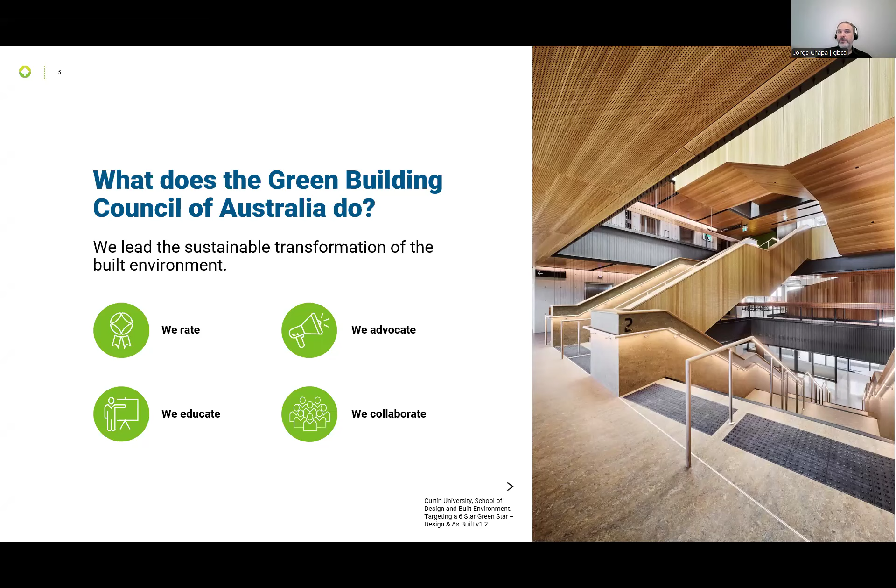We have 4 key areas of activity. We advocate to local, state, and federal government. We do a lot of courses, training, seminars like this. We do a lot of collaboration. Everyone that is presenting today, we collaborate strongly to make sure that we're all aligned, we're all working together towards the same goal. And we're very well known for our rating system, Green Star, which I'll talk about in a second.

And realistically speaking, we also haven't focused on embodied carbon because it hasn't been seen as a big source of emissions for a long time. It was a significant source of emissions, but compared to the other challenges that we had, it wasn't where we were placing our efforts. That's changed, and that's changed a lot in the past few years.

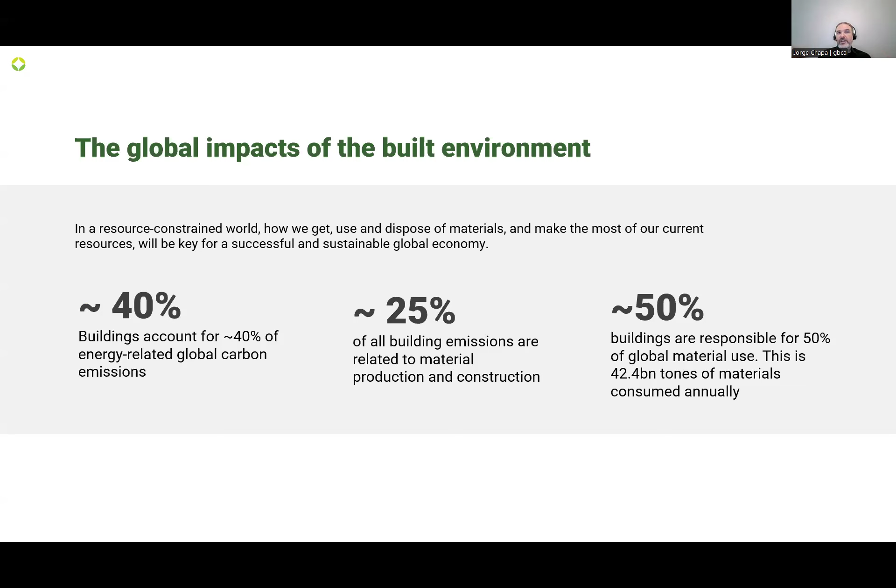So we did a bit of work. We did this report with ThinkStep, the Green Building Council of Australia, around embodied carbon and embodied energy in Australia's buildings. And so we did a bit of forecasting. And we said, if we look at all of Australia's emissions, how much of the emissions are operating emissions? And the answer was 84%. And right now it's probably about as much. Only 16% is embodied carbon. But if you throw your mind forward, if you do a bit of future casting, you find that 85% becomes embodied carbon. Now, what's changed?

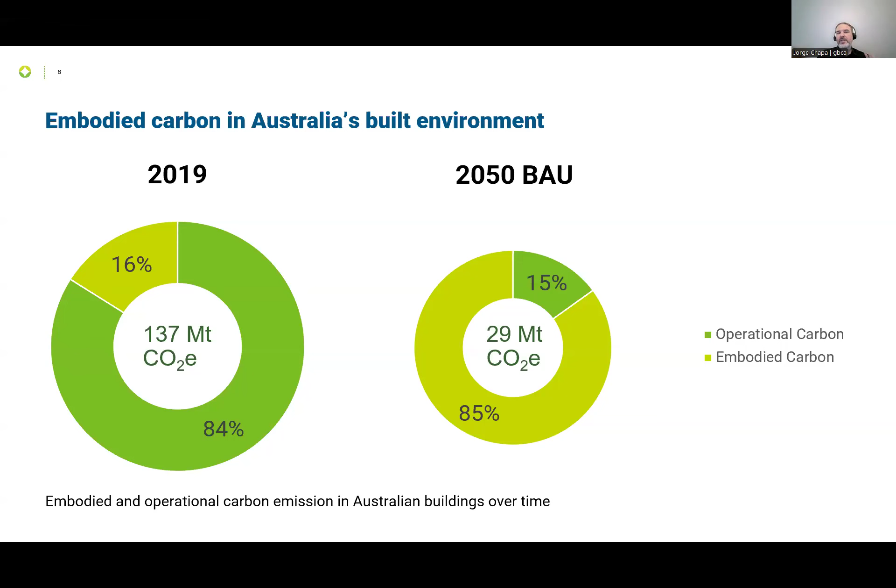And the best way that I can represent this is through a bit of calculations when you think about it in just a building. So we did a bit of work in GBCA, again, a few years back, where we looked at a bunch of sources and said, look, best as we can gather, this is what a typical building looks like in 2020. It's a tenanted building, it's in Sydney, and we're making a lot of assumptions, but it kind of holds.

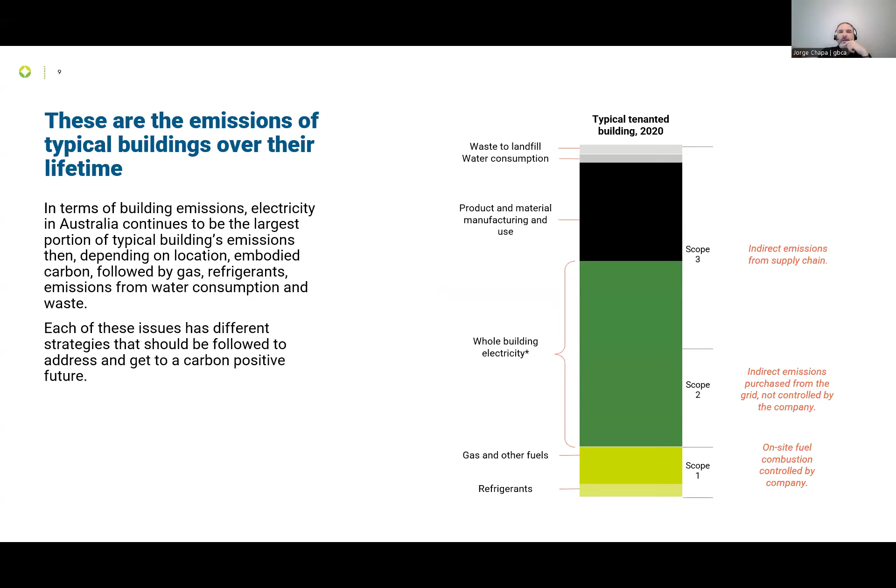Most of the emissions are electricity and other fuels, a little bit of refrigerants, a little bit of waste to landfill, and about 20% of that is product material manufacturing and use. And that actually seems to have been consistent in 2020. And you'll see that there's scope 2 and 3 and so on, but just ignore that for a second. But is that always the case, right?

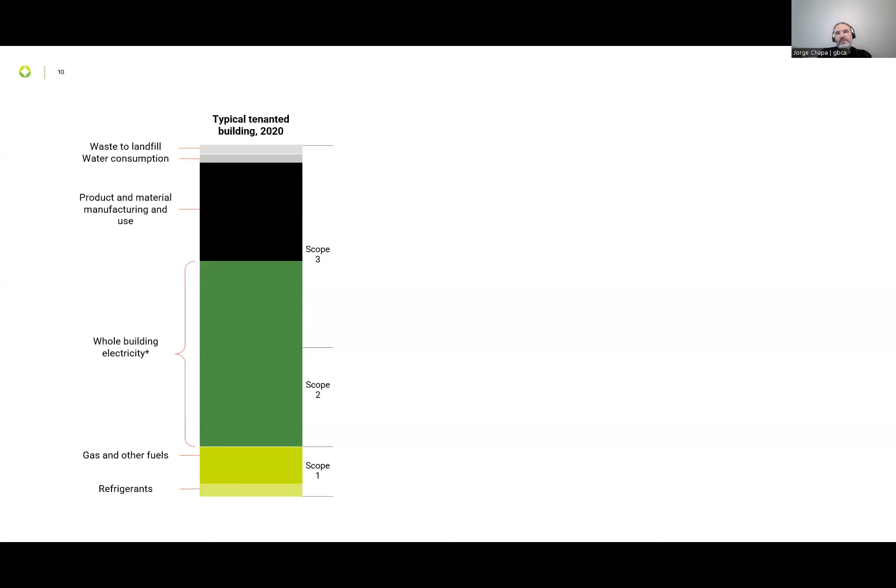Here's the thing. A year later, we had the step change scenario from AEMO, and that showed a much more drastic reduction in the emissions profile of the grid. So we take that building, we apply revised factors, exact same building, but the emissions profile is different. And that continues to tell you that changing embodied carbon or the upfront carbon is really important, but we shouldn't be trading off operating emissions for embodied emissions. We have to start treating them separately. We have to start taking them into account by themselves, because we only get one shot at doing this.

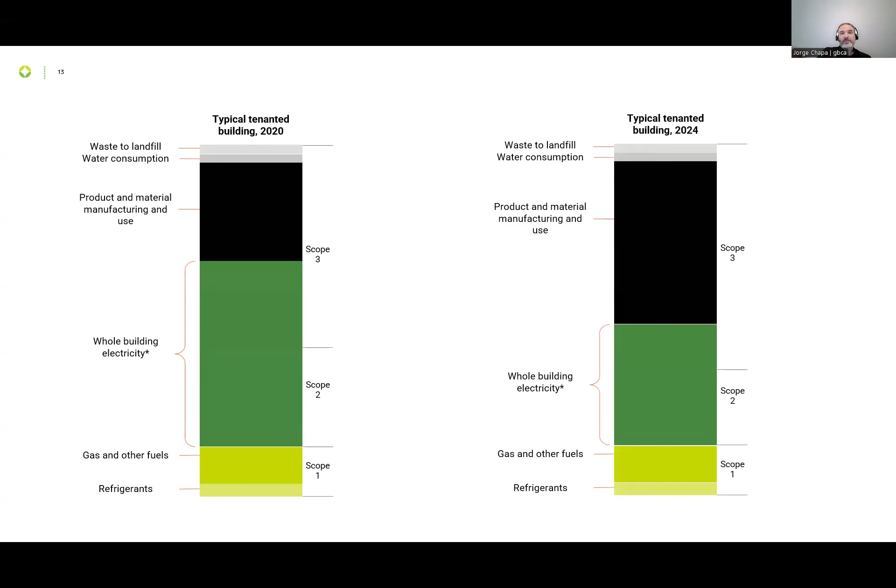And when you look at where the upfront carbon is, you start really realizing why this is the case. Most of the embodied carbon in a building is in the superstructure and the substructure. More than 50% of it is in those elements. You add the envelope and facade and you get to 65, 70%. But we don't change a building structure over the lifetime of the building. We build it once.

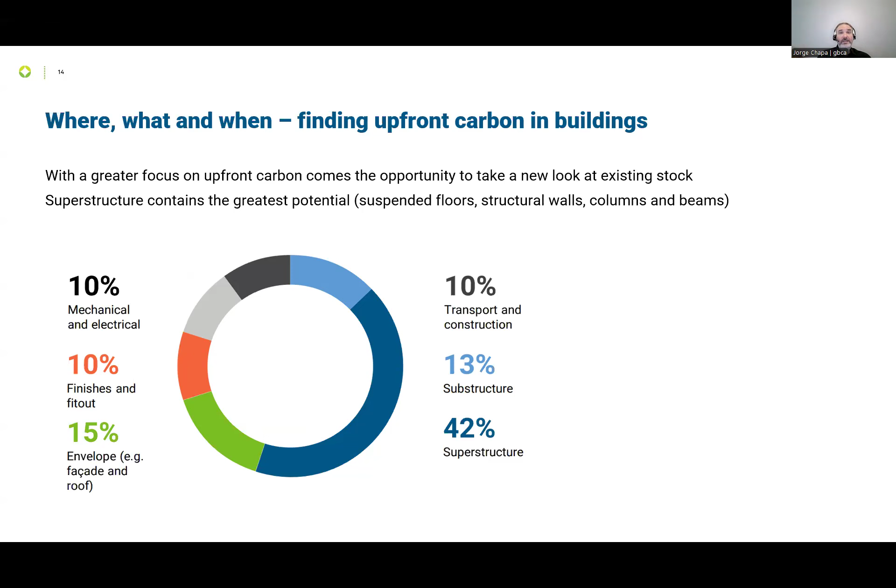We started looking at this problem as well a few years back. We've done a revision to Green Star recently. It's in Green Star Buildings. So in 2020, we launched a change to Green Star Buildings on the basis that we needed to tackle the upfront carbon problem. On the same logic, right?

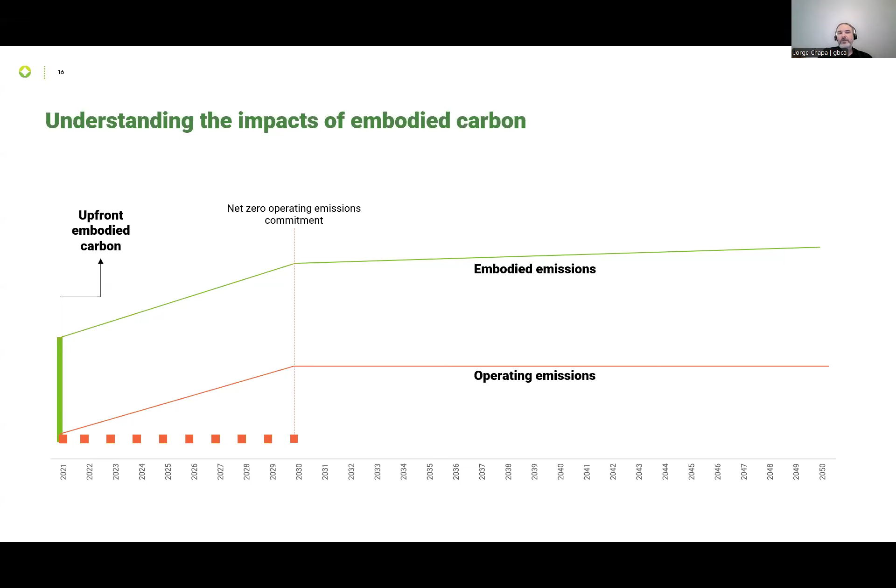We can bend operating emissions at any point in time in the building's lifetime, or mostly we can. We get a few shots at doing that. We can change the emissions profile of the grid, we can electrify the building, we can improve the mechanical systems every 10, 15 years. We might be able to improve the facade every 30 years or so. So there's options to change it, but we can't change the upfront carbon. That's it. We can't do anything about that.

We introduced a credit and a requirement in Green Star called upfront carbon emissions. There's a requirement that you have to do 10% reduced emissions over a typical reference building. And we ended up with a bit of a hiccup, essentially, which is how do we define a reference building? So we have a methodology, we work through it, but then we approached NABERS, and James will talk a lot more about that, which is how do we solve the problem? Because it's not good enough that we have a reference building. You can do a lot of things to that reference building to make it look like it has more upfront carbon and not really change your process.

So we're very excited about the work that NABERS is doing, that we're integrating into Green Star to have ideally a fixed benchmark for the building. We've done that across the buildings range too, but the embodied carbon question also shows up in communities and fit outs. We also have credits that specifically ask for environmental product declarations in buildings, because we're trying to encourage the manufacturers to provide that information to the building sector.

Now here's the kicker. You might say, so what? What you have on your screen are all of the frameworks that currently are driving action on upfront carbon today. So if you're an investor, and you're securing sustainable finance, and your investors are from overseas, the European taxonomy requires you to care. Or in the next year, the Australian one will care. Science-based targets requires you to look at your embodied carbon emissions. GRESB, which is a reporting framework for the built environment, is going to ask for disclosures around embodied carbon.

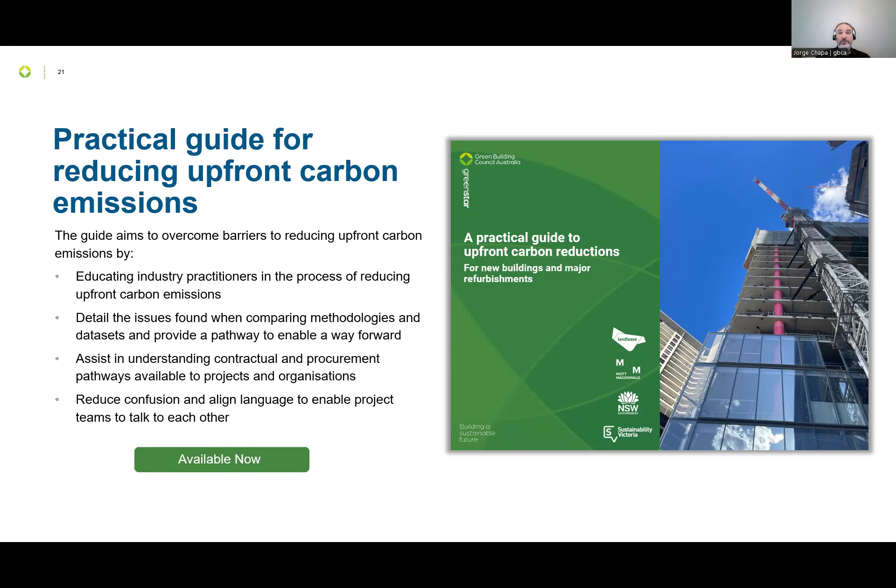If you're interested in learning more about upfront carbon, I hope you don't mind me plugging this, Jeremy, but there's a great guide that ourselves, NABERS, and several other entities worked together on to talk about how to reduce upfront carbon emissions. It is a very practical guide. It gives you a lot of very useful information, and it's available on our website if you want to take a look at it. That's it for me.

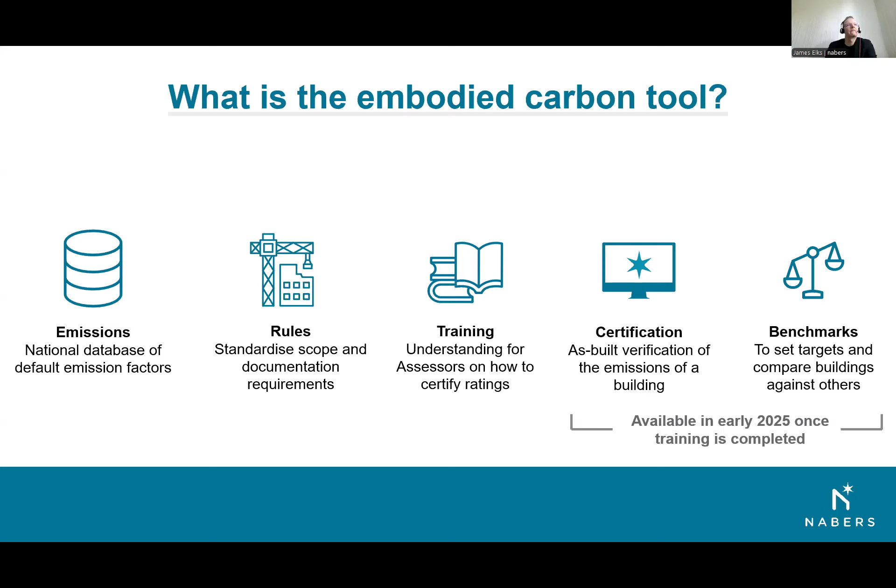So the life cycle of the rating, because we get lots of questions about that, because the rating actually happens at the end. So we'll start at the bottom. You get an embodied carbon rating once your building is built. And you're basically looking back in time, looking at all the stuff that went into the building and saying, we're pretty confident that the amount of carbon that came out of the construction of this building was X.

But before that, we really want people thinking that through, right? We want people to change their behavior as they're both designing and constructing buildings. So we have two things that people can do. They can sign up to a commitment agreement for embodied carbon, same as a commitment agreement for energy, if you're familiar with that. It says, we will reach 5 stars or 6 stars or whatever number of stars you would like. It's 1 to 6 stars for NABERS. We will reach that number of stars when this building's constructed. Then you do the as-built, happy.

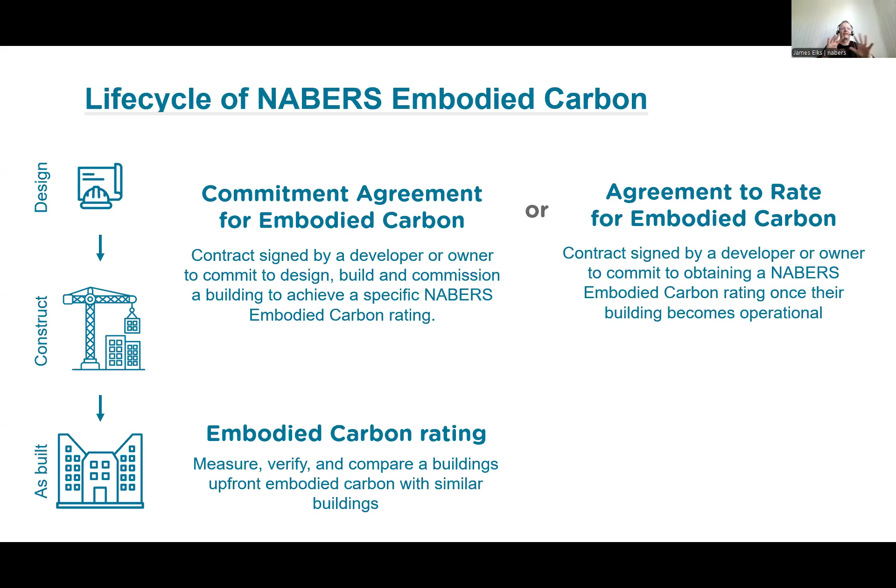The other product we have, which is typically more used in a policy sense, is agreement to rate. And that just says, we will get a rating. We're not sure what it's going to be, but we're definitely going to get one. So essentially, design and construction, those two products, and then embodied carbon. The costs for these, commitment agreements and agreements to rate, are the price that they were previously. Commitment agreements, relatively pricey, $8,375, because it is a big product that does a lot. Happy to talk about that another time. And then agreement to rate, $1,950.

The actual rating itself, we've split into smaller buildings and larger buildings. Obviously, well, is it obvious? Lots of buildings that are doing a lot of work with embodied carbon are larger at the moment. And so the price for smaller buildings under 2,000 square meters is, oh, these prices are wrong. $3,790, and more than 2,000 square meters is $4,790, and that's the certification fee.

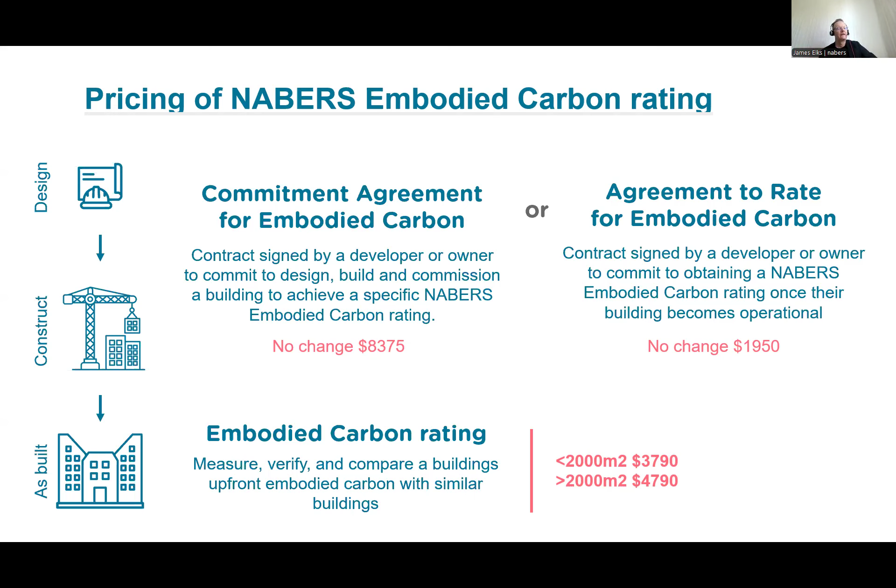So on to training. So we want people to be assessors. Being an assessor is tough, and it's really suitable for quantity surveyors, construction professionals, sustainability professionals, but with a background in things like LCA.

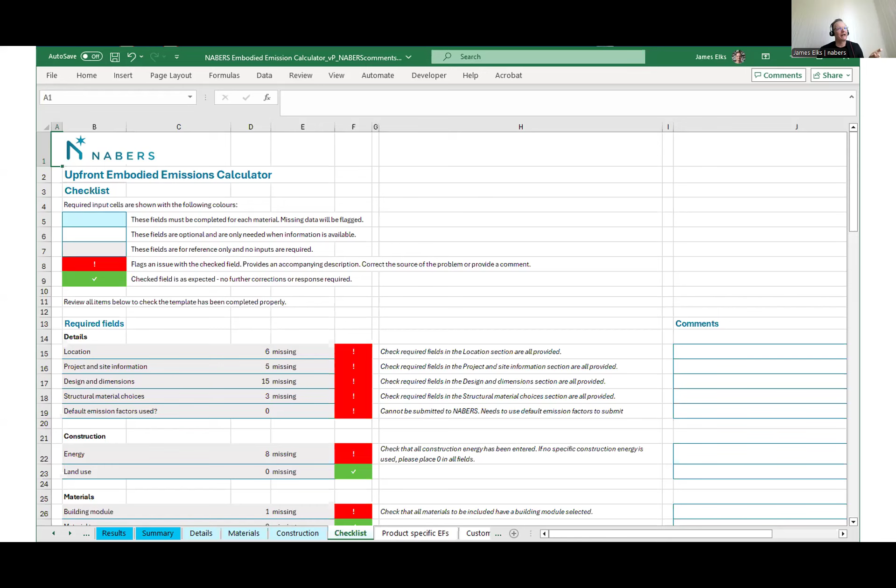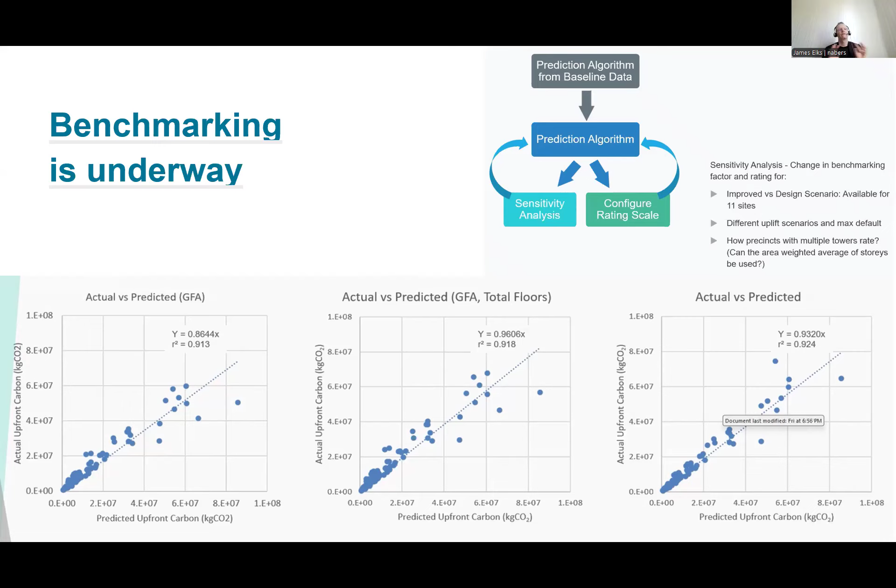which is kind of obvious, but does not necessarily hold true for things like energy. When we're looking at energy or water, the size of the building can be quite disconnected from how much air conditioning it uses. Embodied carbon, pretty good relationship. So we've got that, and now we're starting to look at secondary correction. We're looking at how high it is, is a car park stacker something that's important, really going into quite a bit of detail. Does the type of soil that it's built on have an impact on how much carbon's in it? That's where we're at at the moment. We do a bunch of sensitivity testing on that too as we go. And again, that will be available in the new year.

That's it from me. At this point, it's a handover. We've got the tool, it's launched, people are going to start certifying from early next year, which is very exciting after working on it for 3 years. But what we really need now is some policy stuff. So I believe our next presenter is going to talk on that very topic.

Thanks, Jeremy. What a beautiful segue, James. Thank you for your presentation on the tool, and we'll come back to questions on the tool at the end of Alison's presentation. But as you said, what we really need now is some policy. And thankfully, ASBEC, the Australian Sustainable Built Environment Council, has been busy at work thinking about this exact issue, what a policy framework looks like for embodied carbon in Australia.

So I'd like to introduce Alison Scotland, who is the CEO of ASBEC. ASBEC is a body of peak organisations committed to a vision of more sustainable, productive and resilient buildings, communities and cities. Alison has a passion for collaborating across industry, government and not-for-profits. Prior to ASBEC, she was director at Partner Housing Australasia, a not-for-profit providing resilient housing across the Asia-Pacific region. So, Alison, I'd like to hand the microphone to you now to tell us a little bit about the policy roadmap that you've been developing.

Thank you, Jeremy. And can you see my screen okay? All good. All good, fabulous. So fabulous segue. Thank you, James. I love it. It's like we discussed this order, but that's the whole thing.

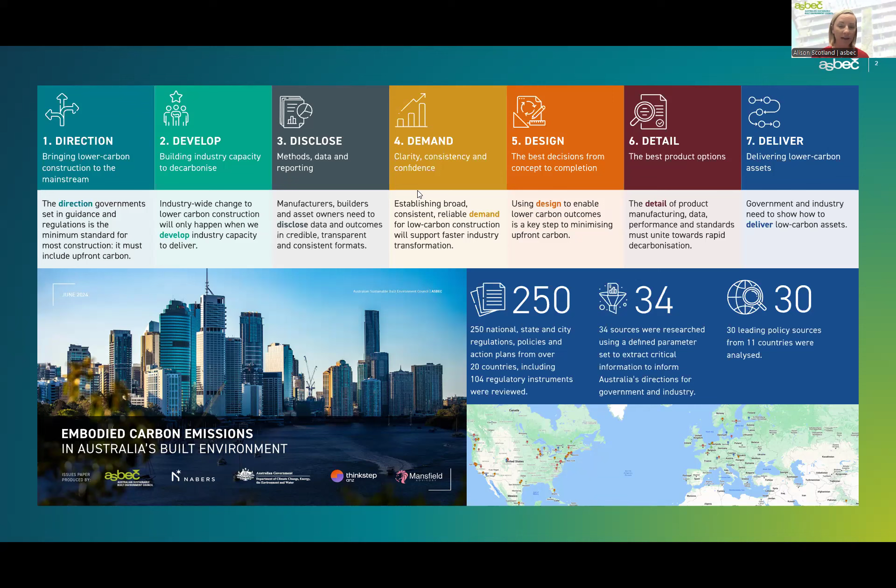So you'll see a few statistics up there on the screen. We wanted to look and see what other countries were doing and how successful they were. Some countries in Europe had policy around embodied carbon dating back a couple of decades. So what can we learn from what different countries around the world have been doing so that we don't have to reinvent the wheel or start from scratch?

So we've come up with some very clear targets around what needs to happen. And not only that, a sense of urgency around getting it happening now. So like Jorge said, the buildings we're building now are going to be around for 50 to 100 years. Generally, that embodied carbon in the superstructure and substructure is locked in. Once we've used it, we've used it.

We know that even just putting a straight line between now and 2050, meaning we have to have reduced our embodied carbon to zero, that's a huge task, and we need to try and reduce that quite soon. So what does that mean? There's a lot of ways of achieving this. And Jeremy touched on that earlier. A lot of it does relate to industrial decarbonisation.

So it's a perfect opportunity for the built environment to signal to our value chain, to our supply chain, that we value them looking at their own abatement. But it's also an opportunity for the built environment sector to look at the way we design, to think about sufficiency, to think about the way we build buildings using the data that has been uncovered and is going to be uncovered by the use of this common tool and methodology.

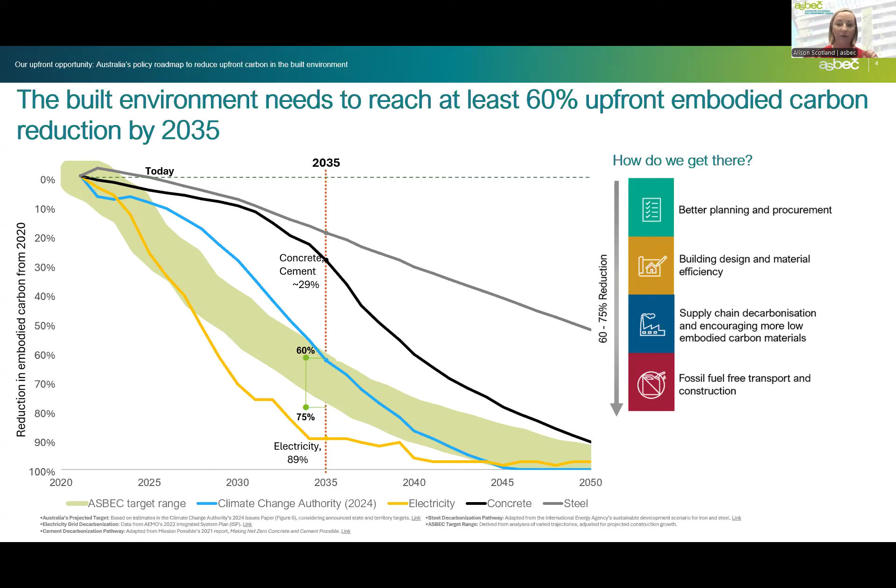That said, supply chain is a huge thing, and we need to set in motion elements that are happening with the supply chain now so that we can help them on their decarbonisation journey. And obviously, another big part of that is with our grid decarbonising, we need to move to fossil fuel-free transport and construction. If we're looking at upfront as the A1 to A5 as part of that methodology, that's where we need to focus. So we need to look at all these levers, and each of them are equally important. What we do now versus what we might do later, that might change. So that's why we need a series of roadmaps related to each of the different levers in relation to how to get there.

What we are hoping to publish very soon for all of you to have a look at and help us work out is a series of roadmaps in each of the levers, what needs to happen now versus what we need to really expect and drive by 2035 to get the reductions that we need to see. So we've got this out within our ASBEC network. We're just consulting on these. They look detailed, but these are our high-level preliminary recommendations, with the view that we've got a future comprehensive framework coming out early next year. This particular set of recommendations will be coming out before Christmas.

But we look forward to continuing to work with you all in relation to implementing policies that are really going to help drive change, because what we found through this journey is it's not as easy. It needs to happen, but it's not as simple as setting requirements through our National Construction Code. There's a lot of supporting policy that needs to complement each other, and because we're talking about our supply chain, it also needs to talk across buildings and infrastructure, because concrete's concrete. We need to ensure that we're aligning, and it's wonderful that NABERS has been targeted at the national level for that consistency across buildings and infrastructure. And we're really excited to see how that translates across the built environment.